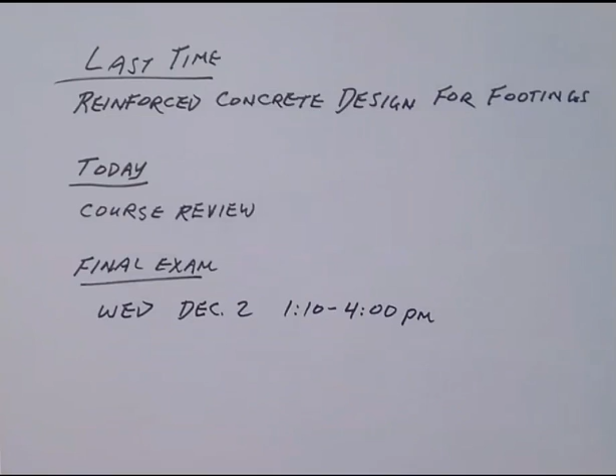Absolutely. How is our other project, like the bearing capacity project, being factored into our final grade? Is that just counted as a homework assignment, or will it be weighted? Yeah, that is just considered a homework.

Okay, gotcha, thank you. My understanding was the target that you would have some feedback today. I don't know if you've received that yet, but I spoke with the grader, I think it was over the weekend, and that person identified midweek, and I said please push for class time. So I believe you should have some feedback on your reports. I may be off a bit here, it might have been last Wednesday that you were to get feedback. I'm losing track at the moment.

But have you received feedback? Anyone seen their material? Good. Okay cool, so I think it was last Wednesday and I'm just mistaken. So that conversation did occur, but I'm a week off on when it did occur. And you should have feedback on that. Regular assignment, I think it was set up as 60 points or something like that, so it would count as a pretty robust homework assignment on that front, and that's all it would count.

Okay great, thank you. Absolutely. For the final exam, the format will be very similar to the midterm, in which you would have on the order of 20 points-ish of short answer - that could be true/false, multiple choice, fill in the blank, short essay, real short calculation - those kinds of items would be part of that. So little 2, 3, 1, 5, maybe 1 to 3 points each, something like that.

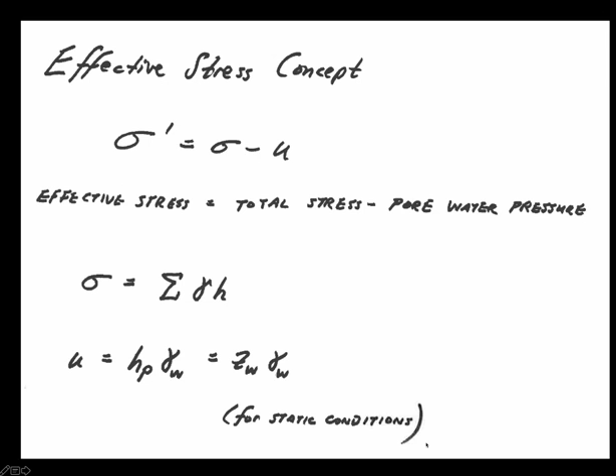And I don't want to say I'm going to have a 381 exam for you, but this sort of material comes up in questions. It's part of a question. So be aware of that and be ready to have sharp skills in that regard.

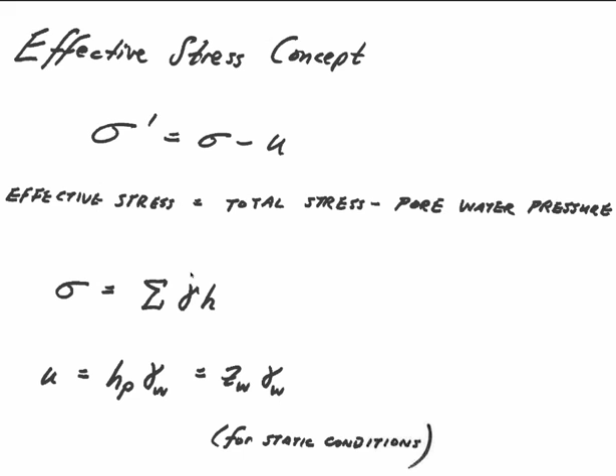Effective stress, sigma minus U, total stress minus pore pressure, where sigma is the weight of everything above a given point. I use a bathroom scale analogy to describe that. We have a column above a 1 by 1 meter or 1 by 1 foot area, and you effectively weigh the material above that. Load over area is going to give you stress.

Pore pressure would be ZW times gamma water for a static case, and HP, pressure head, times gamma water if there is flow. This is a generic expression, the first one, and works in any case, including static. It just so happens that ZW, depth below the water table, is HP for the case of static conditions.

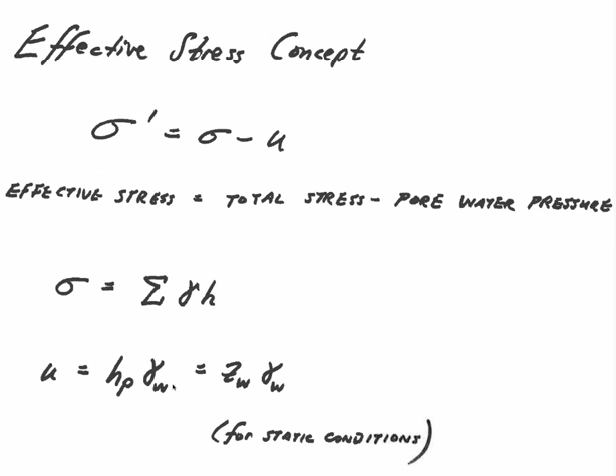3 times unit weight of water, and sigma prime would be the difference between the two. I don't want to take the time here to sort through all the numbers on that. Just the principle, the concept at hand.

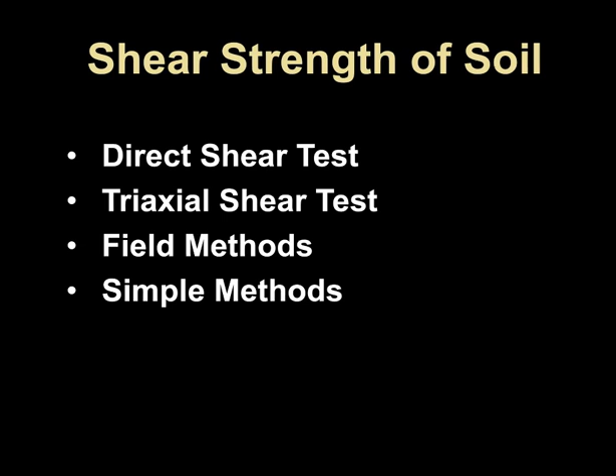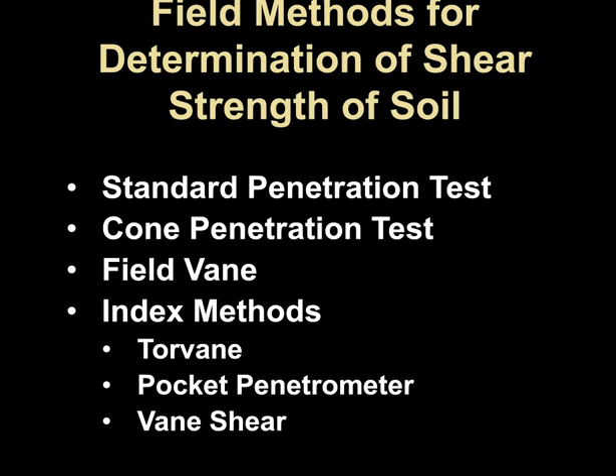Shear strength - there are various methods we can use to identify that. In this class we explored all of these, including quite intently the field methods. The field methods included the standard penetration test, cone penetration, field vane, and some more simple index methods like torvane, pocket penetrometer, vane shear, for example. We also spoke of pressure meter, but that's more of a stiffness determination than strength.

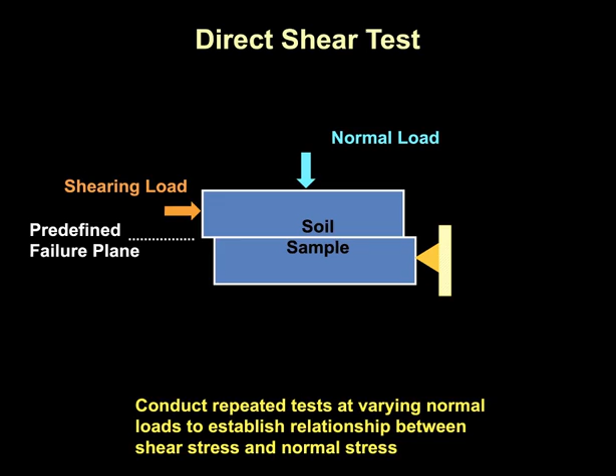Direct shear test involves a normal load being applied, a vertical load, and a shearing load in which you're moving half the box with respect to the other half. You repeat this at different normal loads or normal stresses, different sigmas, and obtain different taus as a function of that. We need to establish what we use for failure.

Would it be tau peak or tau residual? In general, with foundation analysis, you're going to be at the peak - that would be typical that you're using. This residual may come into play on slope stability type problems more frequently, but you do need to establish what is your criterion for establishing a failure in the first place before you begin.

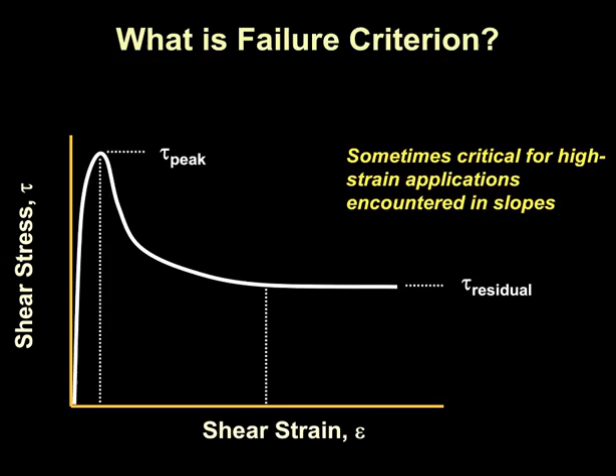Determination of shear strength is going to give you this envelope, this line that we define, a simple line. That line is established as either being called a failure envelope or a strength envelope, depending who you're speaking with - that really kind of means the same thing. It's a limit of strength for the soil, on a shear stress tau versus normal stress sigma plot.

In the case of direct shear, you would have 1, 2, 3 data points that you could identify from such a test. In a triaxial test, you would have a series of circles that define that curve, which we simplify into a line shape, most commonly just a best fit line.

A triaxial test allows for a more advanced coverage of this, in which you're applying a consolidation or confining stress, sigma 3, and then come in with an extra load on top, a piston load that we're going to call delta sigma. The idea is we're providing extra stress because that sigma 3 is already acting downward, and we just zero out the gauge. Remember, water has hydrostatic pressure, so it is indeed already acting downward.

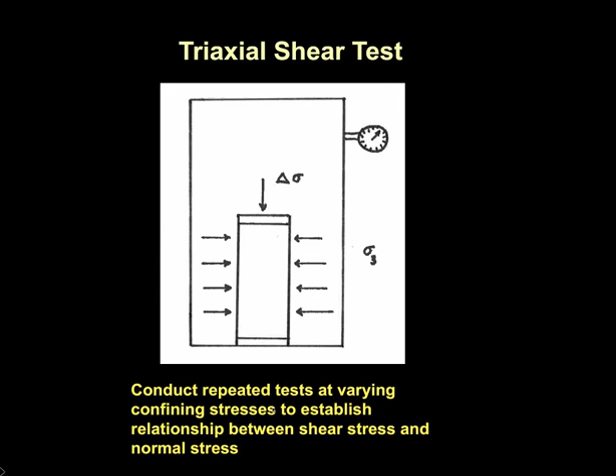Then we come in with extra load on top, convert that out to a stress, and speak of it as a delta sigma. Again, we repeat tests at varying confining stresses, this time sigma 3 instead of the vertical stress used in a direct shear, to establish this relation again - with sigma low, sigma medium, sigma high. This would look quite similar to a direct shear response, but these would be called delta sigmas instead of taus.

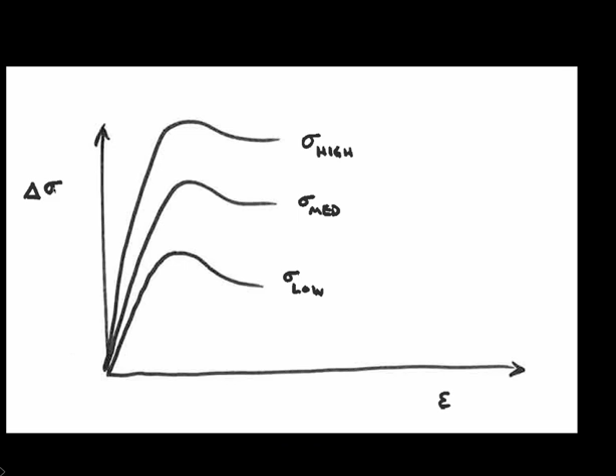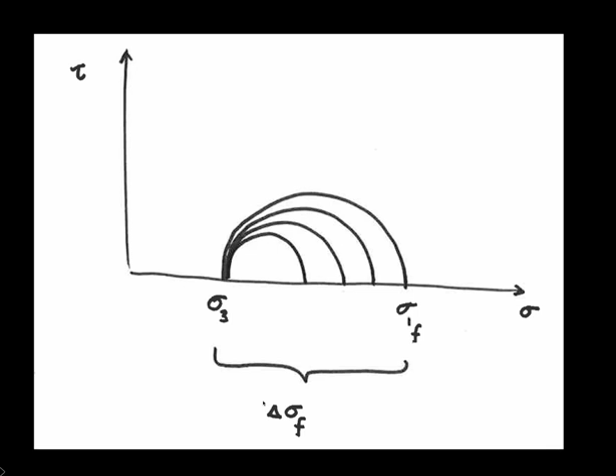If we look at the response from one given test, we apply a sigma 3, and then we introduce a deviator stress - that's the difference in stress, the piston load. That means we're introducing a diameter to the circle, producing a circle that gets larger and larger, and finally it fails at one point. That is our delta sigma at failure, the diameter of that circle.

We do that 3 times - sigma low, sigma medium, sigma high - and get 3 diameters. We plot out those circles and come in with a best fit tangent this time to the 3 circles. It's no longer just 3 points, it's 3 circles being plotted, but still in tau-sigma graphing space, and we still end up with a curve representing phi, the angle of internal friction, and c, a cohesion value. Those are the takeaway design parameters utilized in many geotech applications, including bearing capacity applications that we're about to review.

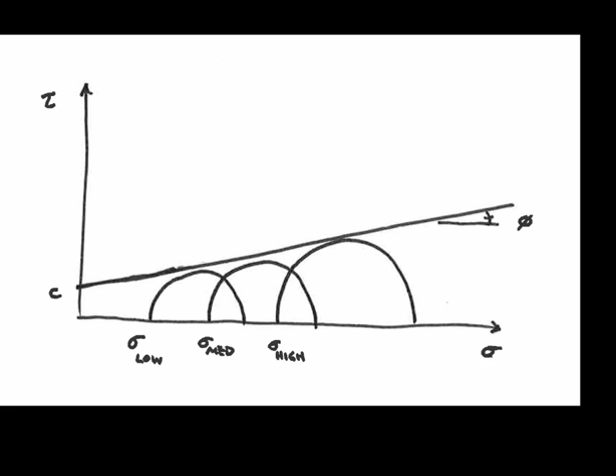There is this business that you can have a total stress representation of stress conditions, or an effective stress - that gets at the undrained solid line versus drained dashed line in this case, and you have different strength parameters. So this can be the kind of stuff behind the scenes on a design type problem where you need phi and c, and you've got your bearing capacity equation ready to pop into: Q ultimate equals c times Nc plus q times Nq plus so on.

But you need the C and the NC, or the C and the phi to drop in there and make some sense of it. And that shifts by an amount, delta U, at failure. That's the excess pore pressure development at failure. Delta U is an excess pore pressure.

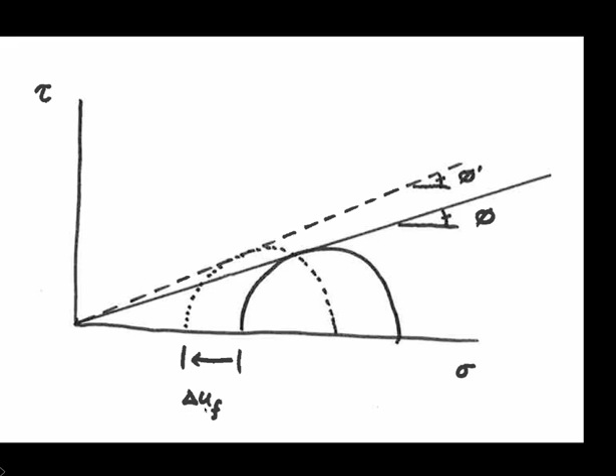There's also UU tests, unconsolidated undrained tests. These are a condition when you actually have a phi equals 0 condition, a horizontal failure envelope or strength envelope, depending what you're calling it. In this case, you have the same size Mohr circle.

The idea here is that water is actually carrying that extra load because it is unconsolidated. The sample has not had a chance to go drip, drip, drip and densify for 24 hours. So it still thinks, from a particle contact standpoint, that it's still sitting there on the lab bench for all that matters, and it hasn't yet felt that high effective stress that you are seemingly applying to it. But by leaving that drainage valve closed, you're just increasing water pressure. So total stress goes up, water pressure goes up by the same amount, and effective stress, the driver for how strong soil is, hasn't changed.

There is a version of this test that is the special case where your confining stress is 0. That's a very simple test because it's open to the atmosphere. There's no membrane or test cell, no water pressure involved. It would be analogous to a concrete cylinder being tested. In that case, you have this general appearance.

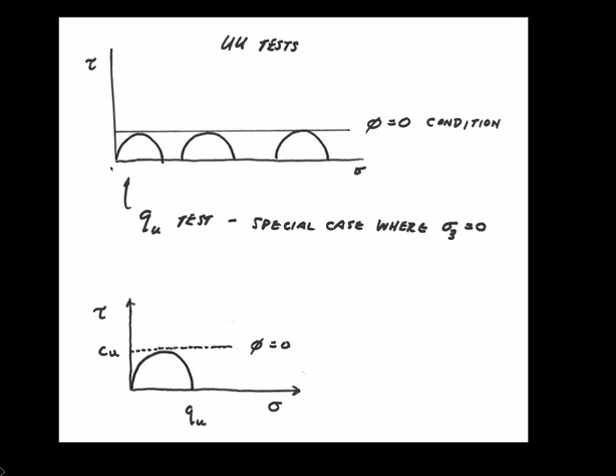There is opportunity to investigate at what angle of failure this will occur. It will be at 45 plus phi over 2. This, by the way, is an angle that shows up a lot in geotechnics. I'm sorry, this thing's jumping forward on me.

And that comes from 2 theta over here, the angle from the sigma 1 plane, which in a triaxial specimen, a conventional triax test at least, is the horizontal plane, because you have a vertical piston load coming in. So this is your sigma 1 plane. It's a vertical stress, but a horizontal plane. And this is then 2 theta away from that, because theta in real space shows up as 2 theta on a Mohr circle.

What is this angle? 90 plus phi. And you can dissect that from a right angle, 90 to the right of that vertical line, and phi being this little angle here from this line over to a vertical. That's just similar triangles with this guy. So 90 plus phi will lead to the theta angle being 45 plus phi over 2.

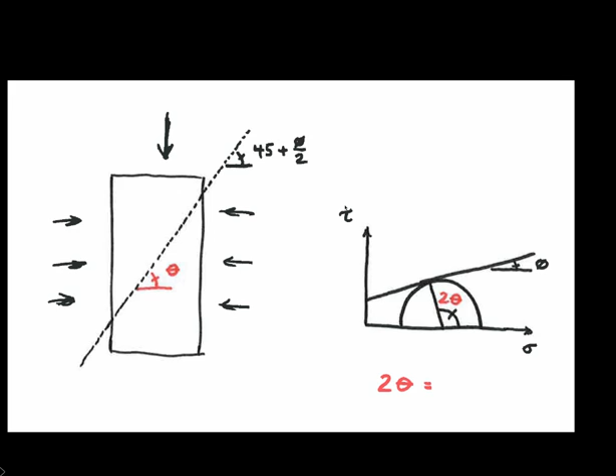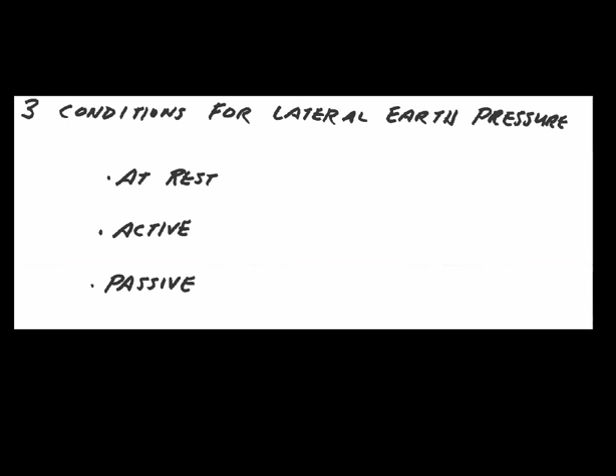If we look at lateral earth pressure, there can be an at-rest version, an active version, or a passive version. This is some of the material that you need to get into for horizontal loading of foundations, such as a retaining wall.

You have an at-rest case in which you have a vertical effective stress. Horizontal effective stress is going to be K naught times sigma V prime, and K naught is the at-rest lateral earth pressure coefficient. Soil just sitting here, it's under the ground somewhere, nothing moving. K naught is 1 minus sine phi, that's for normally consolidated soils. K naught can get this factor of square root of over-consolidation ratio if indeed you have an upgrade in that regard to address over-consolidated conditions.

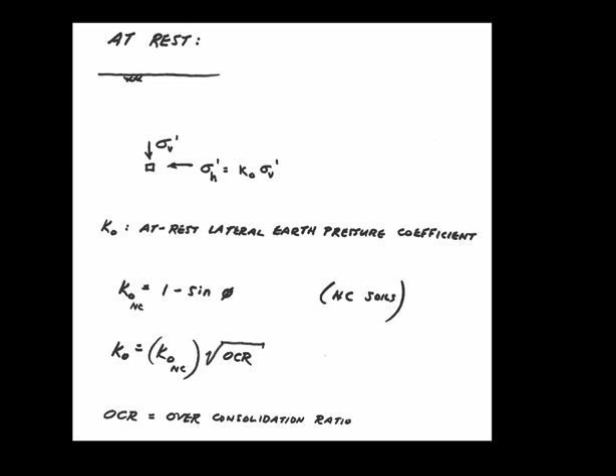An active condition exists when a soil is somewhere like this in which it's being allowed to swell horizontally, in a case where sigma 3 is being reduced. You could envision that being a case where the wall, a retaining wall, is moving away from the soil. It's very much exaggerated in this graphic, but just to show the idea of this. The equation is quite similar: sigma H prime, horizontal effective stress, is Ka this time, which is the active lateral earth pressure coefficient. Ka is tan squared of 45 minus phi over 2.

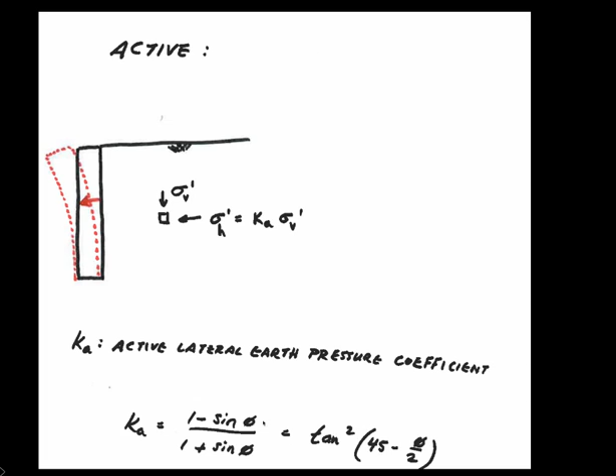And that also equals this fraction if you prefer that version. An active case would look like this if it fails, and you can look at the geomechanics of that. You're back at this 2 theta, and you're back at this 45 plus phi over 2 for that angle. And that is actually quite intuitive.

If you yank that wall away, it would tend to produce failure planes, something like this. And that looks reasonable for the case where you'd be removing a wall from a given location.

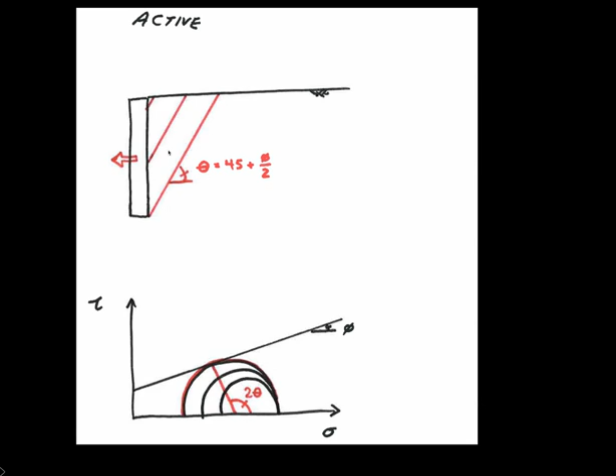Passive is the converse of this. This is where you're increasing sigma 3, in other words, having the wall pushed into this case. Having it look like this is a little bit unconventional, but on the resisting side of a wall that's moving outward is more likely to be the case for this.

Vertical effective stress still holds. Horizontal effective stress this time is Kp, passive lateral earth pressure coefficient, times vertical effective stress. And this time it is tan squared 45 plus phi over 2.

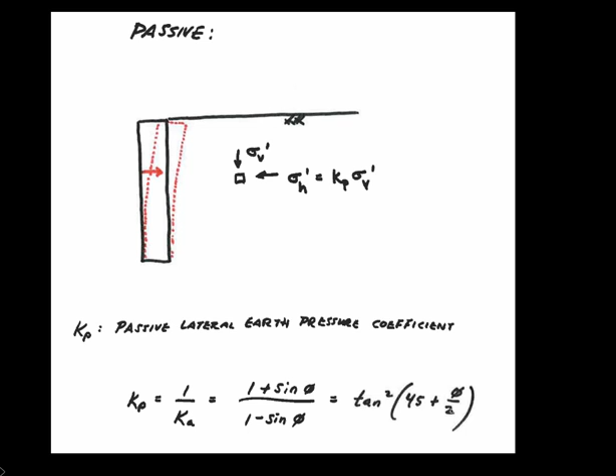And if we look at the failure for that, if you push a wall into soil, it will actually push back on this kind of failure plane. And you have to look at a fairly complicated diagram here. And in this case, actually, horizontal stress becomes your major principal stress.

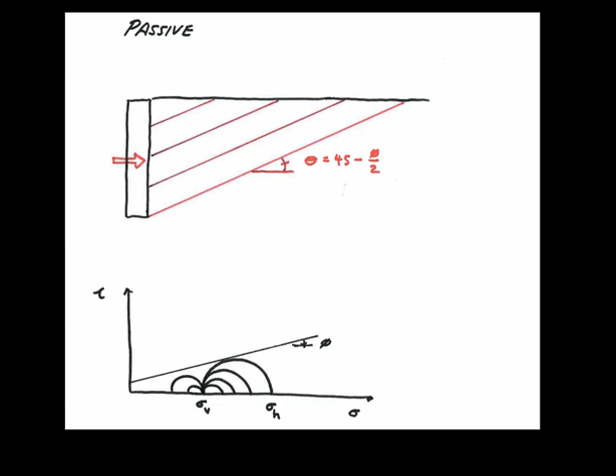So that takes a little bit of head scratching to establish your condition for where your angle is and so on, and how you get to this 45 minus phi over 2. I'm not planning to get into any kind of derivations in this class, let alone today.

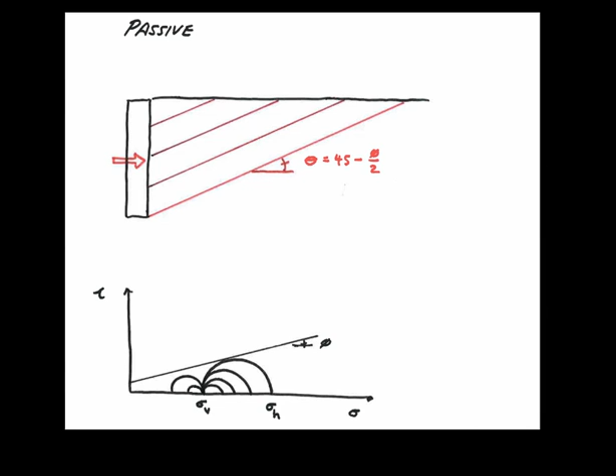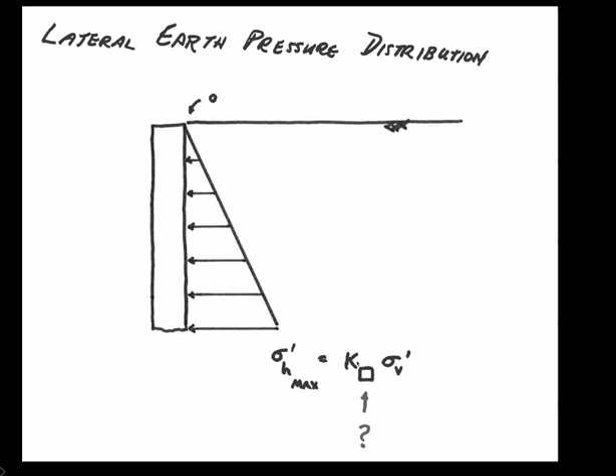And you would have a distribution of lateral earth pressure in which the last point of that, meaning the base of this triangle, is sigma h equals K times sigma V prime. And you just have to figure out which K you're talking about: at rest, active, or passive.

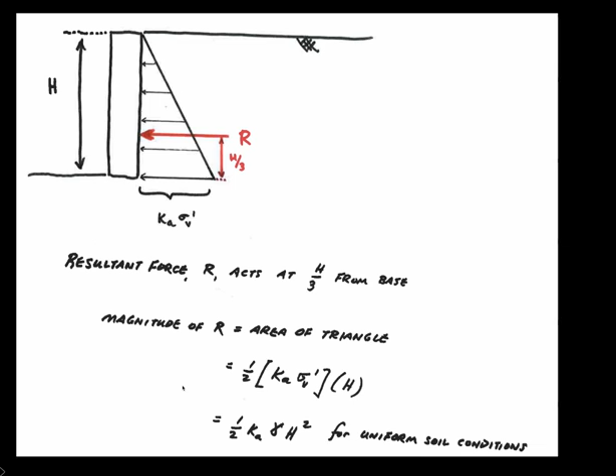It'd be fairly common to have active behind a retaining wall, and you have a resultant that would be pushing that wall over. The area of that triangle is 1/2 base, Ka times sigma V prime, times height. And that would be for uniform soil conditions.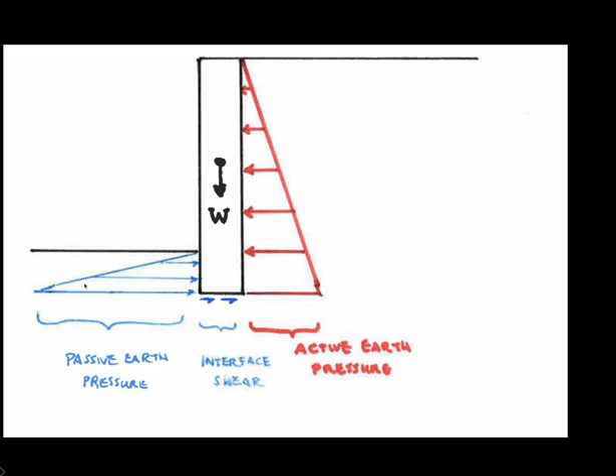And the interface along the base is going to be the downward weight of whatever you have. I have a wall in this case, so we could speak of that, but on a foundation, you're actually going to have a column load and so on. It's going to be gamma times the volume if it is a weight, or it's going to be just your vertical load.

I'm sorry, this thing's very jumpy today. And your interface friction angle would be delta, and interface adhesion would be C sub A.

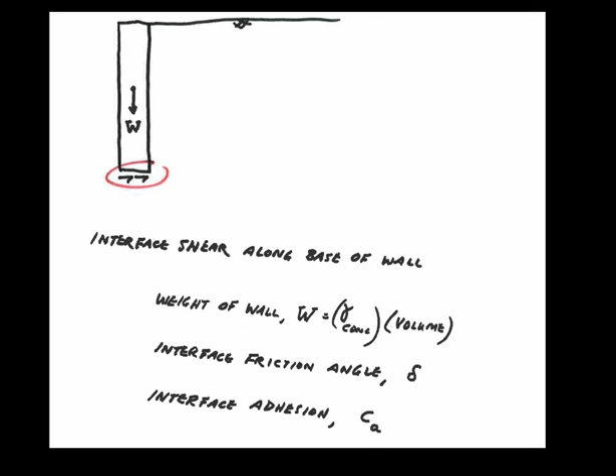And the interface shear resistance looks a whole lot like the Mohr Coulomb strength envelope: tau equals C plus sigma tan phi. That's soil versus soil. Now we have soil versus another material such as concrete, so it's tau equals C sub A, adhesion instead of cohesion, plus sigma times tangent of delta, interface friction angle instead of angle of internal friction.

And this is the stress version. This is the force version. And you'd need the area of the base to be converting accordingly between those two.

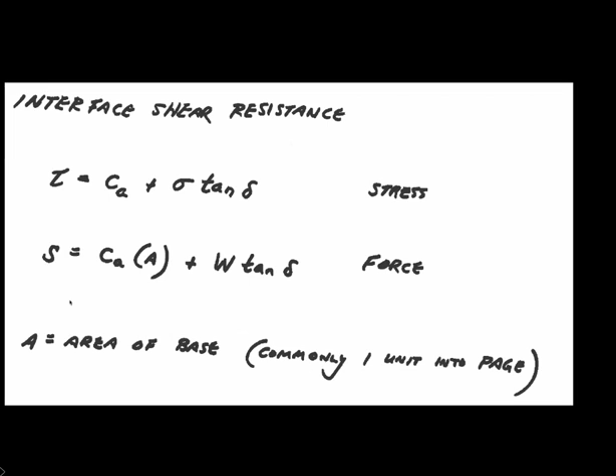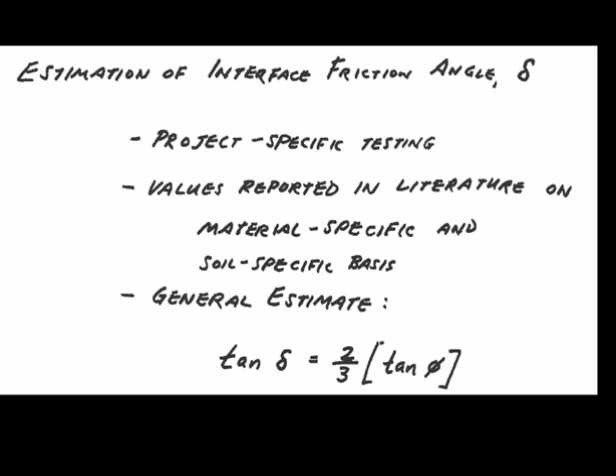And if you need an estimate for delta, project-specific testing can be done, but in short, the tangent of delta is about 2/3 times the tangent of phi. That just means coefficient of friction gets reduced for concrete soil versus soil. Adhesion, a little bit loose, is 0.5 to 1 times cohesion.

And onto foundation, to the actual design type stuff. And certainly what you just saw was horizontal loading of foundation, so that is design.

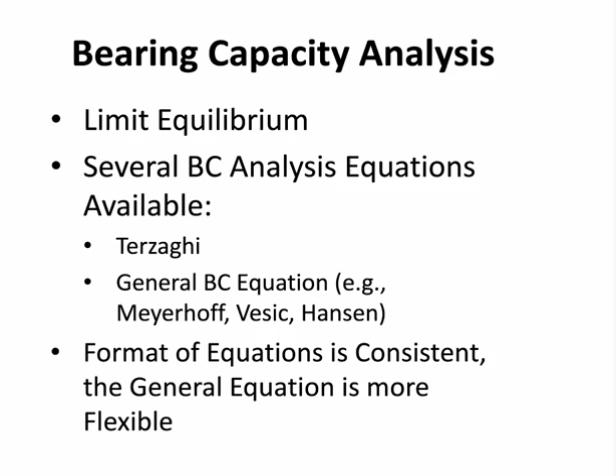But we'll look at bearing capacity, stress distribution, settlement and rate of consolidation, reinforced concrete design, and if time permits here, a few concepts about deep foundations, not a high priority. That's just a little look forward as to where this course can serve you.